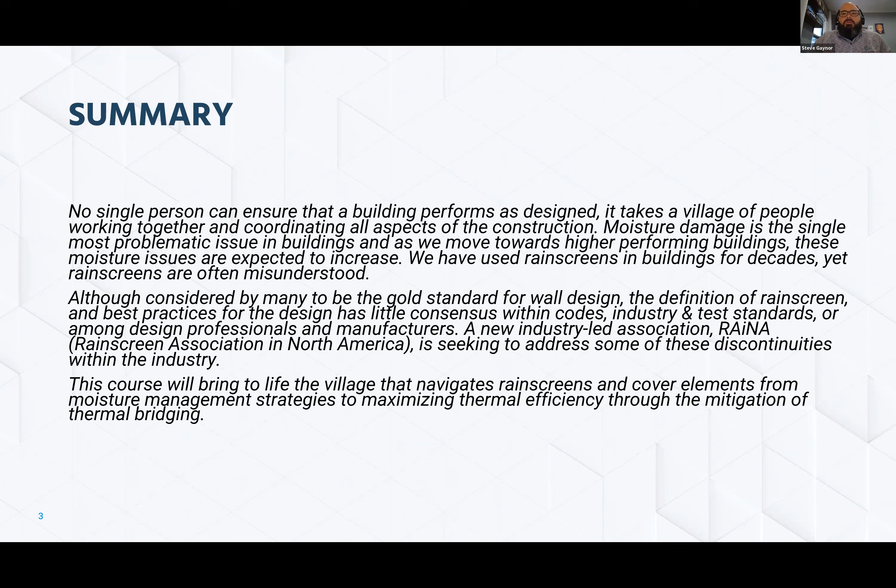So we're going to talk about Rainscreen, which is considered to be one of the gold standards for wall design. The issue, though, is that Rainscreen is not well understood, maybe even by some of those people who talk about it often. One of the reasons why is because there's a lot of different people talking about it, and not a lot of coordination. That's why we'll get at the end to talk about how it takes so many stakeholders and why the Rainscreen Association was formed.

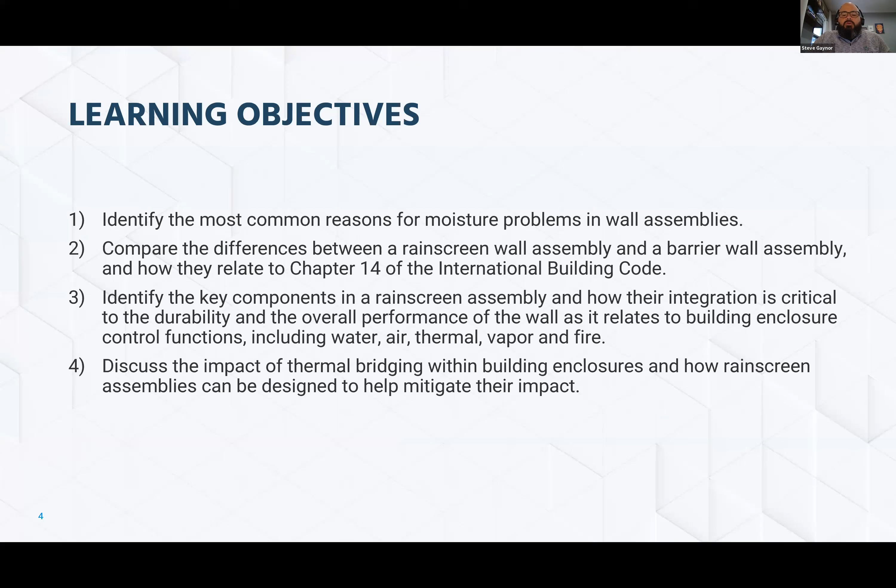So the learning objectives for this presentation are to identify the most common reasons for moisture problems in wall assemblies, compare the differences between a Rainscreen and a barrier wall, then we're going to identify key components in the Rainscreen assembly and some considerations for each of those components within Rainscreen assemblies. We'll get a little bit further into the impact of thermal bridging. You should be able to discuss what those issues are with thermal bridging in building enclosures and how Rainscreen assemblies can be designed to mitigate that impact.

So we'll start with moisture in walls, get into those components. As we talk about those components, we'll have a deeper dive into the thermal bridging discussion, and then we'll talk about the Rainscreen Association North America.

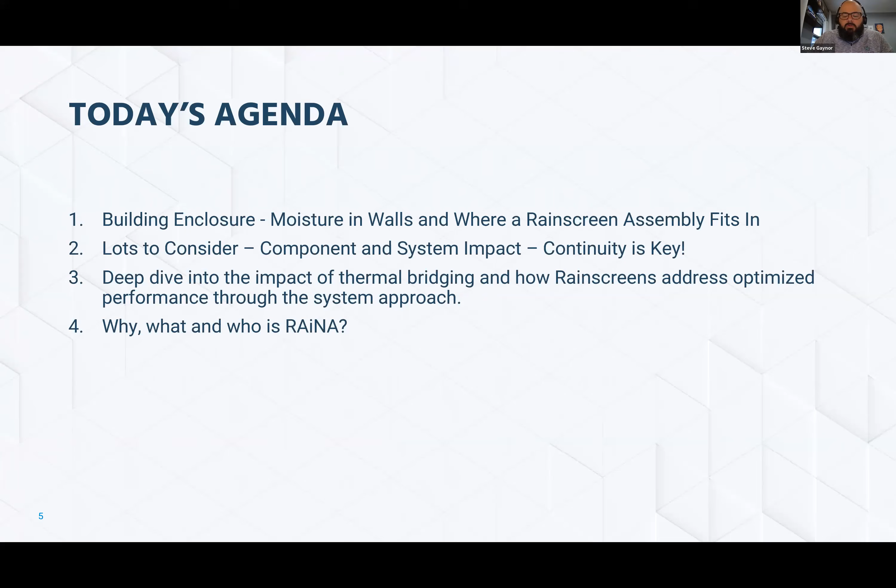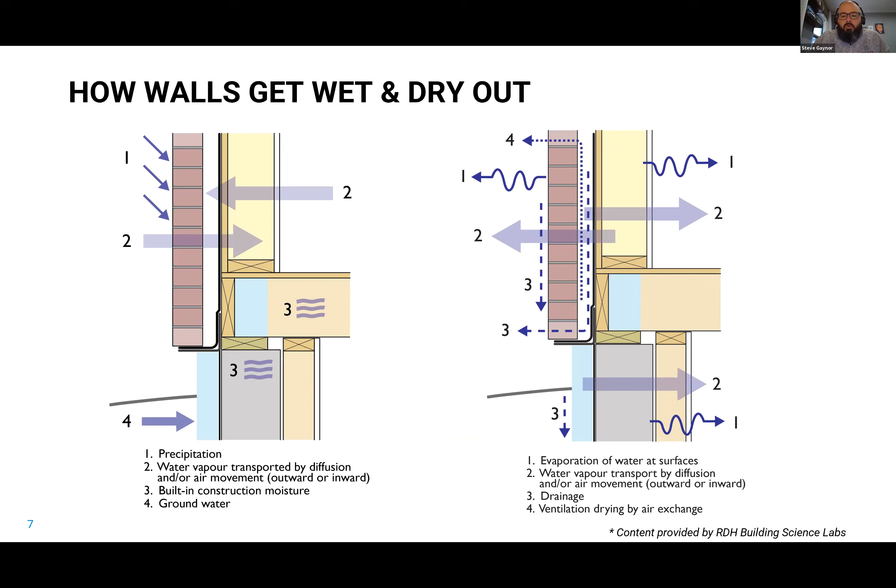As that liquid evaporates, it creates water vapor, and you want to evacuate that through ventilation and drying. Number four there is through air exchange with the exterior. And number two, you also have water vapor diffusion occurring in your favor for drying out—it can be designed to do that also. We'll get into a bit more about that as we go on with these next few slides.

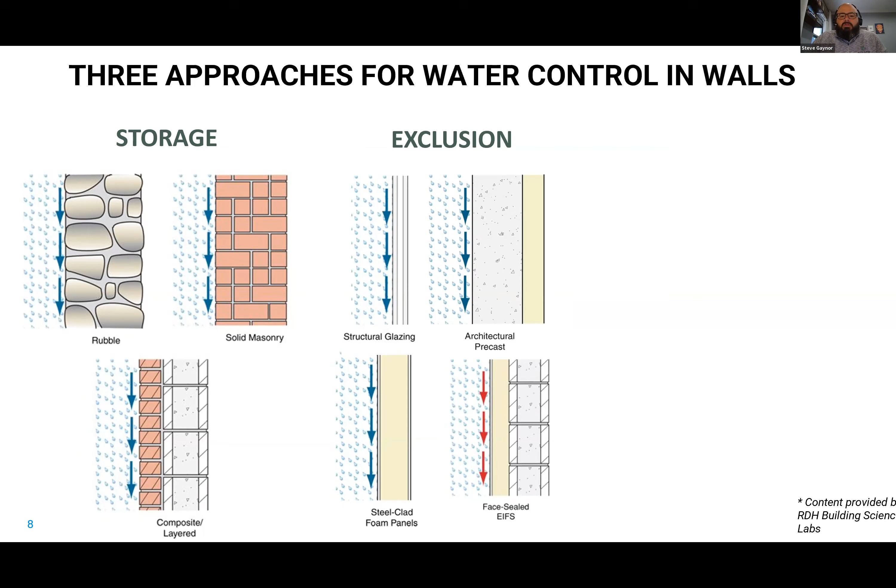Now those seals obviously have to stay perfect over time in order to maintain that perfect barrier and avoid water into the wall system. But some of these other wall designs that we're familiar with have the same intent—to keep the water on the face of the wall system.

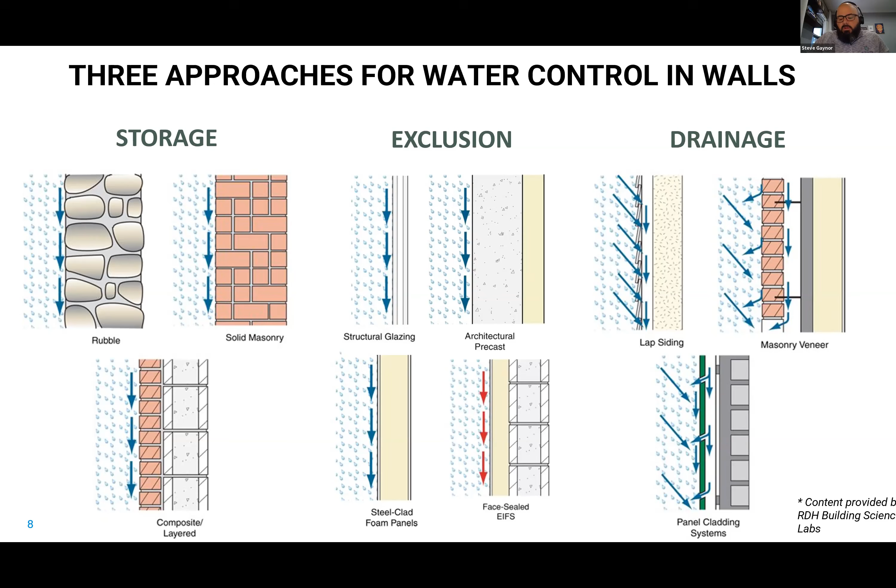Finally, you have your drainage wall systems, and this is where rainscreen fits in. It's a much broader category beyond rainscreen in terms of drained wall systems, but rainscreen is one of these. A drained wall system says the cladding doesn't need to resist 100% of the water coming to the wall, or the face of the wall doesn't need to resist 100% of the water—we're designing the wall so that water that gets in can be drained out, managing it in a different way. We'll talk a lot about that in the coming slides here.

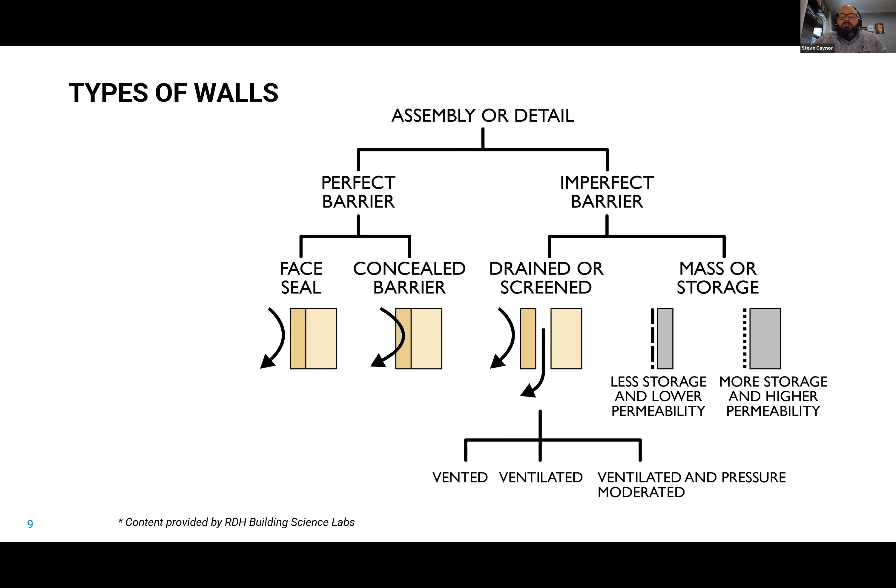It maintains water control by storing that water and shedding most of it, so you don't have leaks. Finally, where Rainscreen fits in is drained and screened walls, that third design where you're managing moisture within the wall system through venting, ventilation and pressure moderation, etc. So what is a Rainscreen?

A Rainscreen, as defined by the Rainscreen Association of North America, is an assembly applied to an exterior wall which consists of, at minimum, an outer layer, an inner layer, and a cavity between them sufficient for the passive removal of liquid water and water vapor.

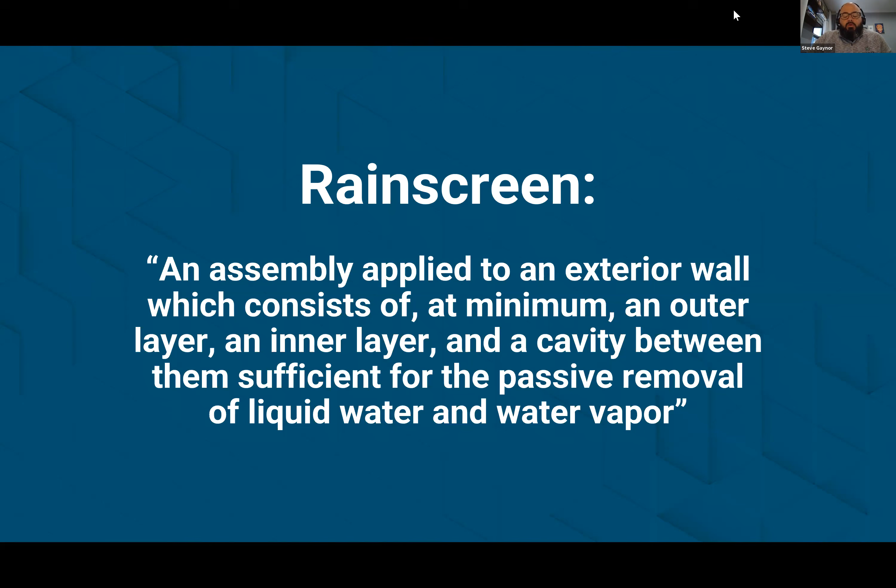I won't repeat that exact definition again since it appears several more times as we go deeper. The Rainscreen Association of North America has defined it this way, and it's the simplest way to describe what constitutes, at minimum, a Rainscreen.

What you're looking at here is the definition above and the parts of the definition described in the diagram below. Again, an assembly applied to an exterior wall system which consists of, at minimum, an outer layer. You see on that diagram to your right.

You're looking at a vertical section of the wall. On the left is a plan view detail, and on the right is a vertical section of that same wall.

A simple, rudimentary Rainscreen design has an outer layer, number 1, which is your cladding or some other face, and an inner layer, which is typically your water barrier or some water control layer that might be insulation or some other system.

And then a cavity between them, number 3, sufficient for the passive removal of liquid water and water vapor. Numbers 4 and 5 show drainage and venting for the passive removal of liquid water and water vapor. That's it.

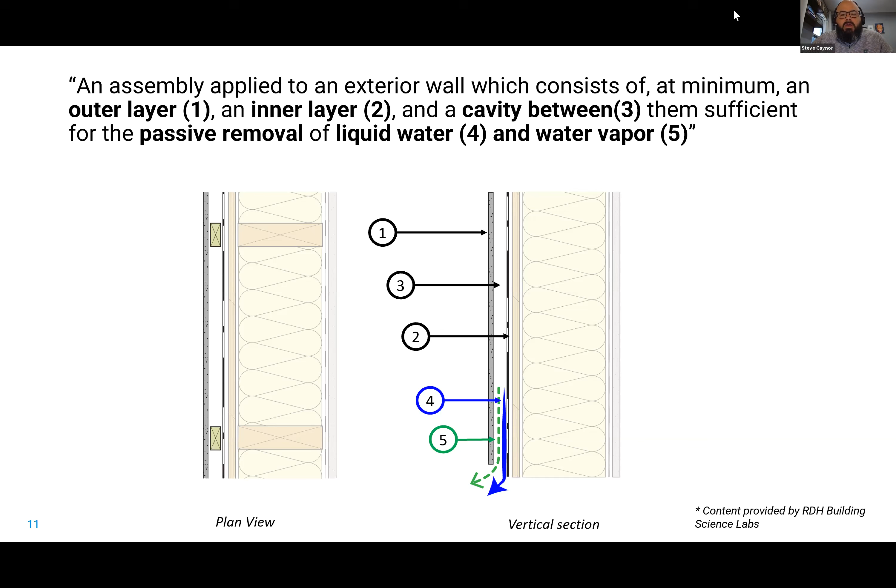That qualifies as a Rainscreen. Obviously there's more to making a high-performance wall system than qualifying for the bare minimum of a Rainscreen, and we'll talk about that later. But that is the explanation of the definition.

It's important to note that almost any cladding material and almost any backup wall separated by a cavity that is drained and vented or ventilated can become a rain screen. Even though you might think of materials typically used in a certain way, often we can redesign those wall systems to use rain screen principles.

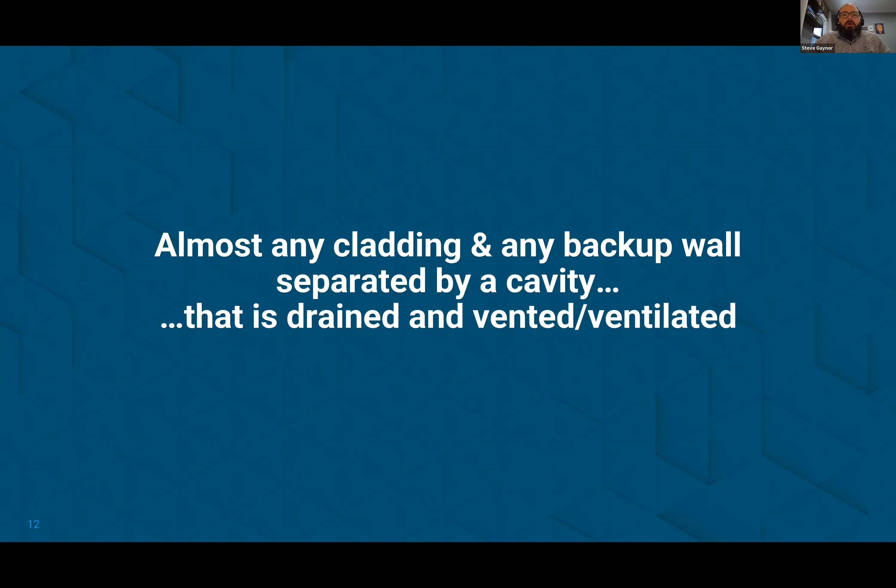So it's not beholden to any particular material. And it's important to note it's not just about the material, but about the system coming together as a whole. It's not the cladding alone, it's not the backup wall alone — it's the cladding, the backup wall, sometimes insulation, etc. That's what this slide is about.

This is saying we have different kinds of wall designs that qualify as rain screens, and we have different buildups within the cavity that might occur, but that doesn't mean we're veering away from rain screen design.

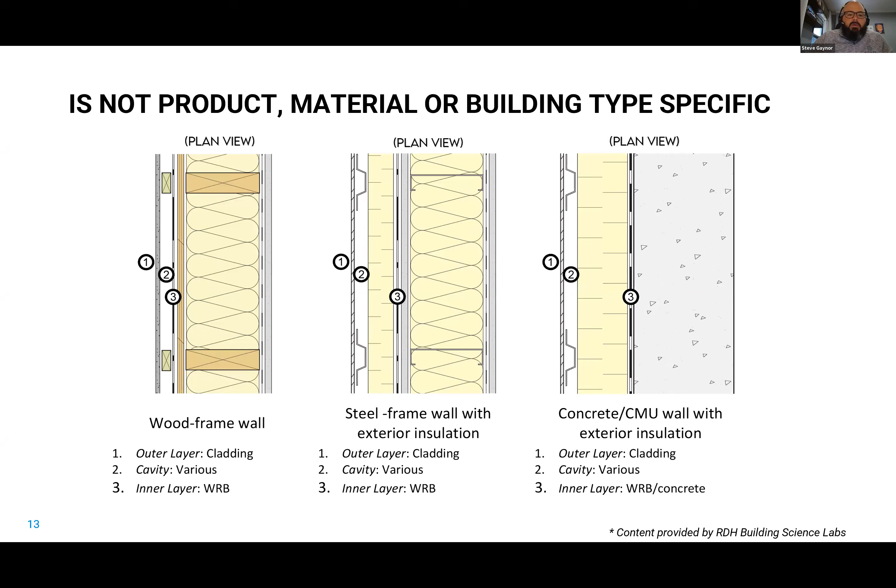To get further into that, we provided a little diagram here going from one end of the spectrum to the other. What I like about this diagram is that each of these wall systems uses a metal cladding.

It shows a metal cladding and stud wall design to demonstrate that with just a different geometry and slight modification, we're moving from one design to the next. It has very little to do with the materials themselves.

Under the not-rain-screen section on the left-hand side, you see your barrier walls, like we talked about before — typically your sealed walls. What we're trying to do is keep the water on the face.

Also under that section are your purely drained walls — walls designed without venting or ventilation that are designed with drainage, possibly for insulation purposes. There are functional performance reasons to do that, but they don't necessarily qualify as rain screen walls.

Then at the dividing line, you start with drained and vented walls — these are the rain screens you typically see with rigid panel systems.

And then all the way at the other end is pressure moderated, pressure equalized walls, where you're creating small compartments. It's a highly engineered system to moderate pressure and manage water tightly towards the face of the cladding.

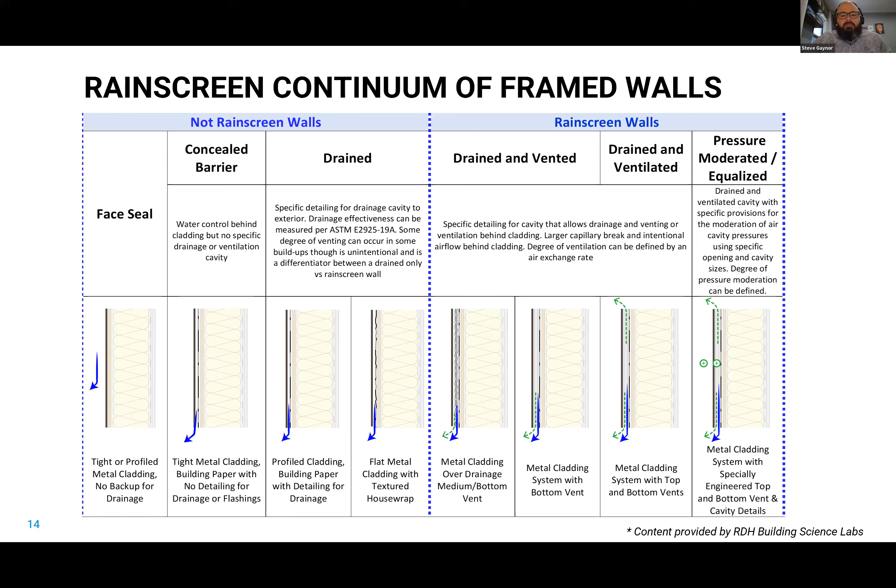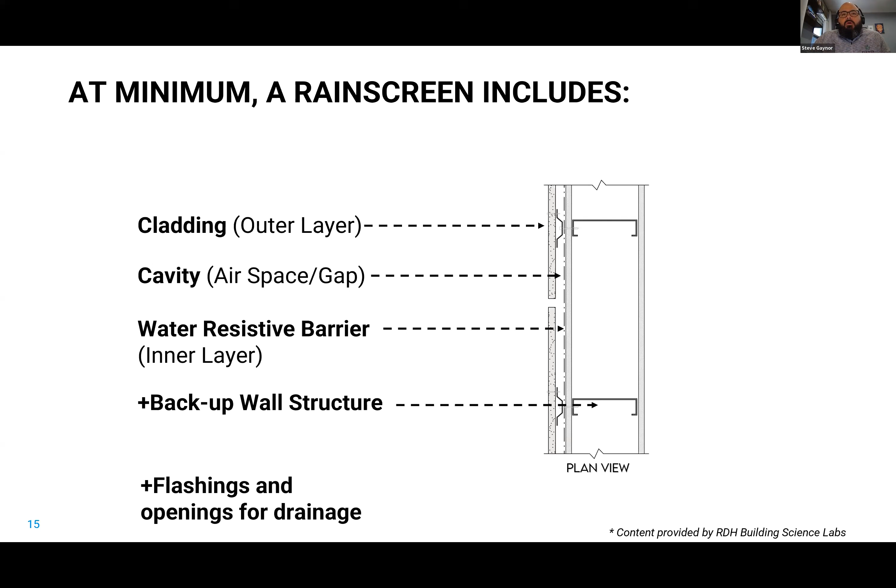That's the spectrum, and we'll get further into some of those designs as we talk about components later in the presentation. So as we said, at minimum, a rain screen includes that outer layer, that air gap, and that inner layer. Obviously there's a backup wall, flashings and other openings for drainage, but that's what's required. However, there are other components in a rain screen wall for different designs and functions.

Some of those components might be a cladding attachment. You need to figure out some way to keep that cladding up on the wall, and that cladding attachment has some other functional purposes that we can talk about.

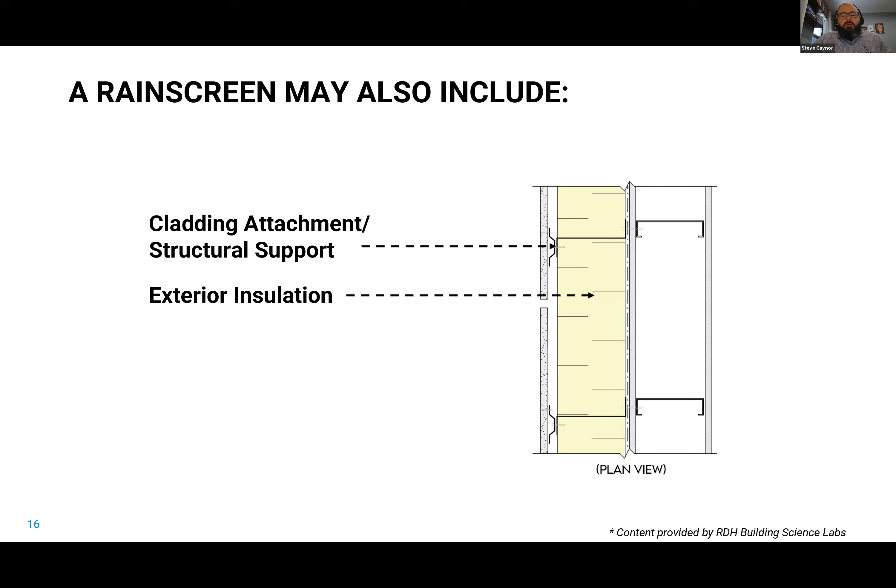Exterior insulation - more and more we're seeing exterior insulation because it's required in most of the country, and that's often going to be in your rain screen wall. That's insulation outboard of your exterior sheathing.

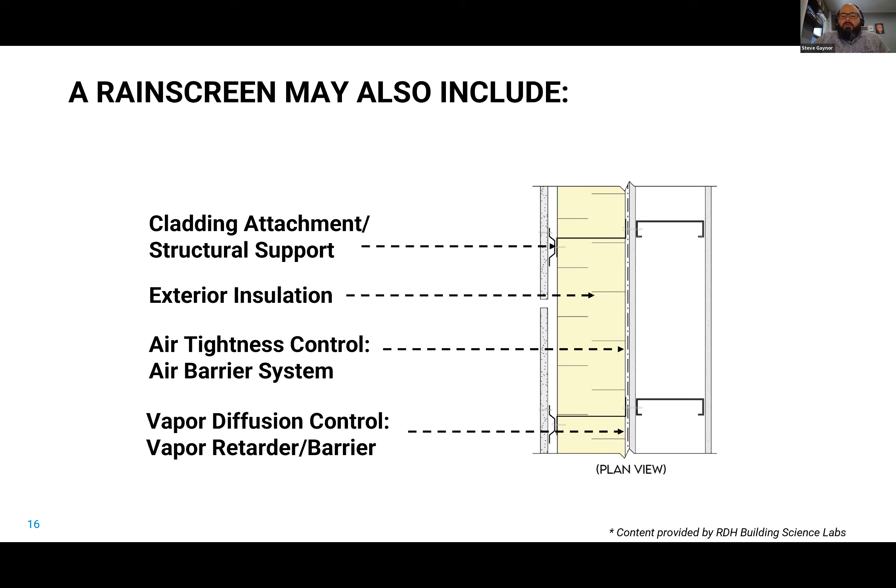We said there's an outer layer and inner layer, and that inner layer is typically your water control layer. But you might also have an air barrier in the rain screen system somewhere, and that air barrier might also be your water barrier. So it could be separated, or it could be the same thing, depending on the design and needs of the building. Same thing with a vapor barrier - less common to see it on the exterior, but it also might be there.

So let's get into those components a little bit. Now that we've defined what a rain screen is and all the components that might be in a rain screen, let's start with cladding. That's what everybody sees when they see rain screen. Often people confuse cladding to mean rain screen.

They might say that material is a rain screen material, which is often incorrect because rain screen is the whole system together. But almost any material can be a cladding in a rain screen, and it's not just the ones you've thought of. The Rainscreen Association is even working with the stucco industry on guidelines for rain screen designs using stucco materials, and that just goes to show it really is about the principle rather than the material.

The important thing for cladding is that it's an exterior finish, that it's water shedding, and that it's unprotected from the environment. That's usually what defines the cladding.

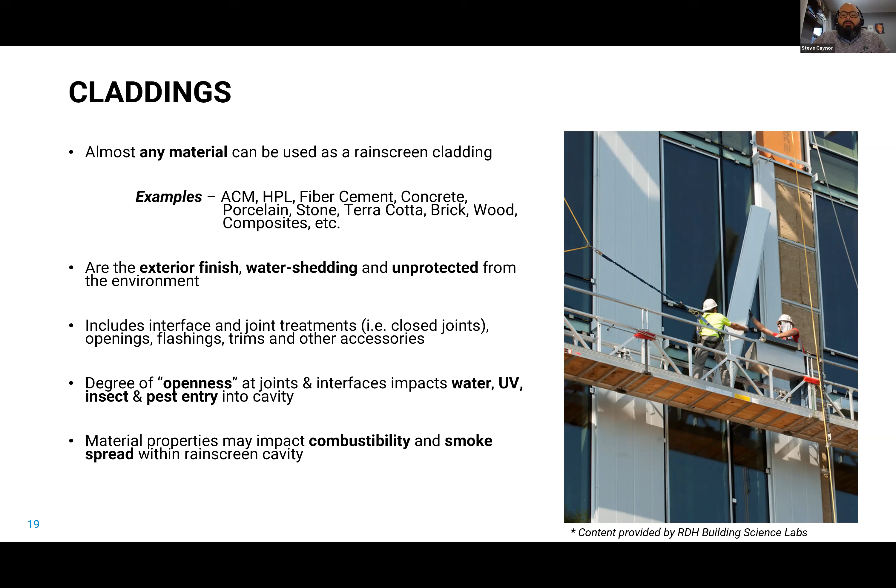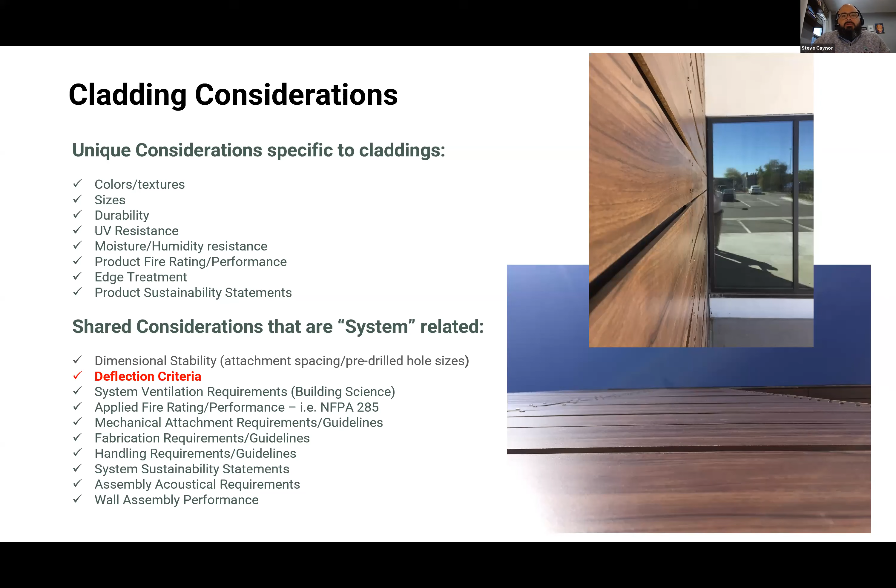You might be designing your rain screen with a metal system or composite material that's able to deflect a fair amount, and those things are designed into not only the panel but the system and the rest of the wall. The same thing if you're designing with something like stone or porcelain that's much more rigid - you're thinking about the rest of your wall system in terms of how it has to be designed to achieve that deflection criteria.

Cavity, or your airspace, your gap - whatever you call it - we have to think about this as a component. This isn't just empty space we're leaving. We are creating this component when we design a rain screen, and we're creating it when we're installing a rain screen.

One of the things I often tell contractors in trainings is that you're treating the cavity as a component, just like anything else you can hold in your hand, making sure that component's in there when you're doing modifications, alterations, things that aren't necessarily on the drawings, decisions you have to make in the field. This cavity is an essential component of a rain screen.

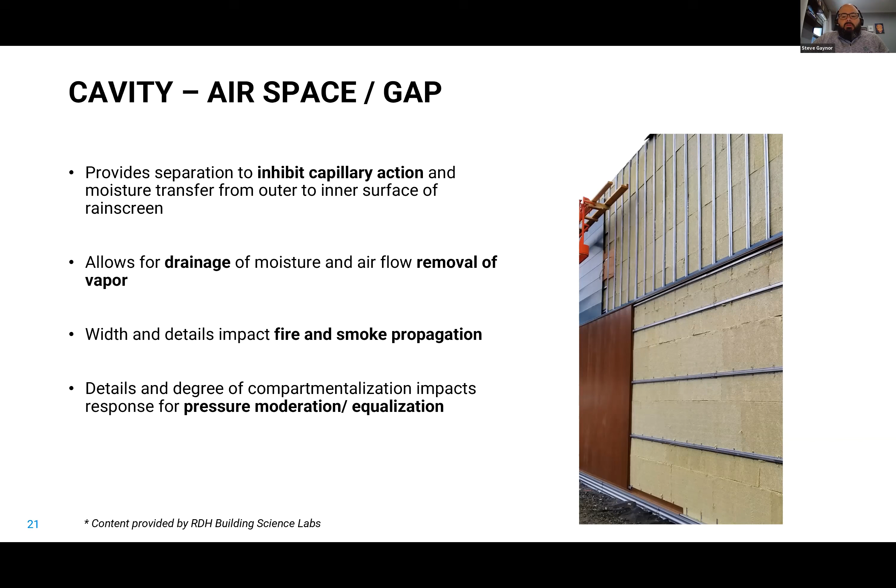Some of the things it does: it allows for drainage and airflow, it inhibits capillary action. On pressure-equalized designs, the cavity geometry, design, and the way we compartmentalize the cavity is of utmost importance. But it also has other considerations, like when we're talking about smoke and fire propagation.

The cavity also provides us with additional functions. If you look at a face-sealed barrier wall system, like we said, it has to be perfect - you're keeping that water on the face of your system. The only drainage plane you have is that face of your system.

With rain screen, because we're putting that cavity in there, because we're separating out the different layers, because we're looking at this as a whole system, you have multiple drainage planes. Not only do you have the face of the cladding, but you have the back of the cladding, you have the face of the insulation, and finally you have the water resistive barrier. So you're creating four drainage planes.

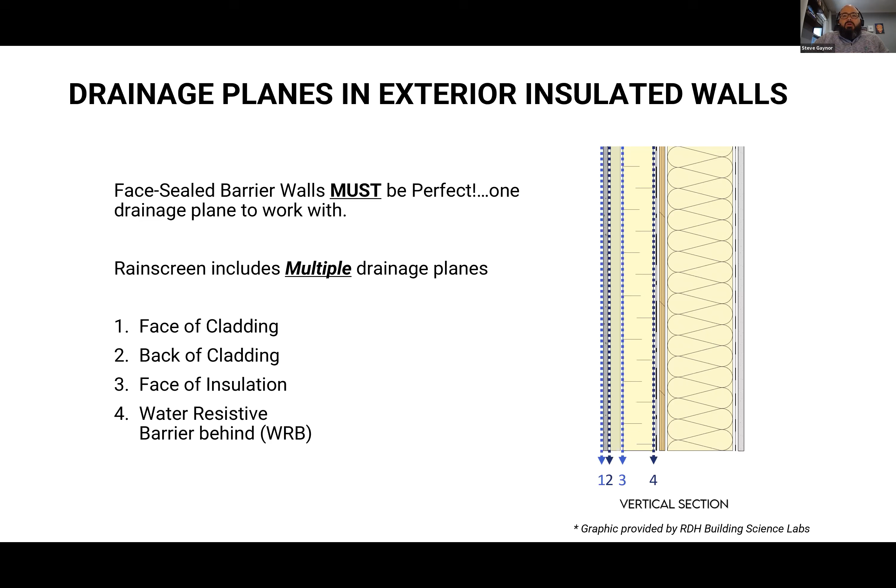Anyone who's had the opportunity to perform an AAMA 509 test and stand in that box and watch as your rain screen performs, watch behind the rain screen and watch where water goes - you'll be amazed to see water drain down the back of that cladding.

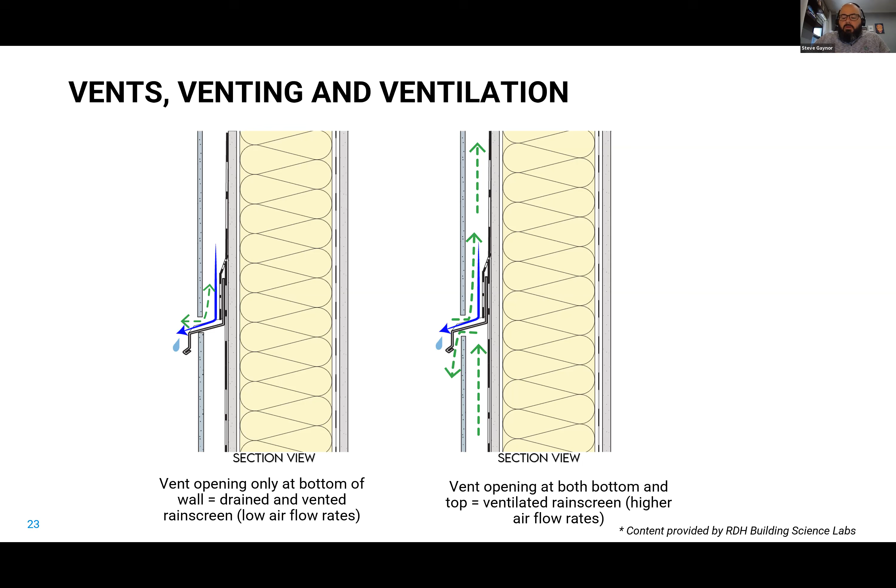Now moving beyond the cavity, we have our water resistive barrier. This is what we were calling the inner layer in that definition. The water resistive barrier might not be a membrane — we all think of membranes when we talk about water resistive barriers, but it might be a system, it might be included in your insulation, or it might be some other system. Whether it's a membrane or another system, your water resistive barrier is an integral part of your rain screen, and it has its own considerations.

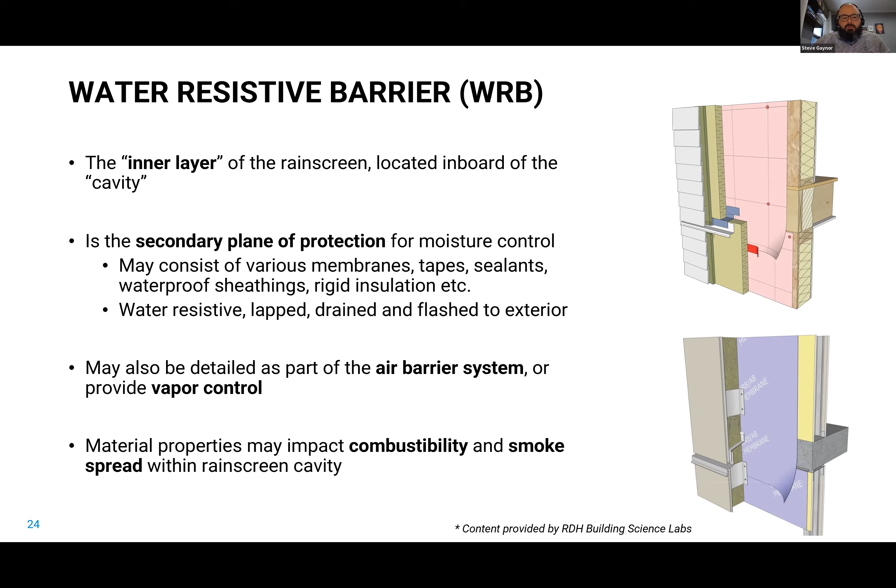Often when I was helping architects a long time ago trying to design wall systems, the question was whether you're going with fluid applied or sheet applied. But now there are so many more options, and they end up being specific to what you're trying to do in your wall system.

One of the things that's very common to talk about these days regarding the water resistive barrier is penetrations by the cladding attachment components. Obviously, we need to attach things outside of the sheathing, and that attachment means we're going to have penetrations in the water resistive barrier regardless. So the question is, what do we do about them? Manufacturers have tons of guidelines around those.

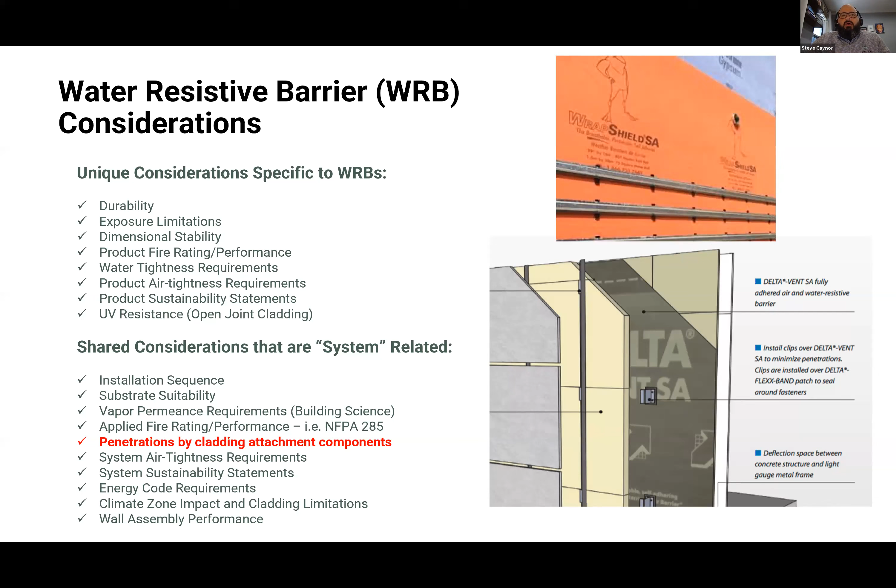Contractors are trained to address those, and there's a lot of consultants out there also helping to address them. The Air Barrier Association, one of the partners for RAINA, is also working on this issue for water resistive barriers, and I know several other organizations are part of that discussion. So I think we're going to see some science-based literature on this in the near future, to see how much of a problem it really is, if it's a problem at all, and how to address it.

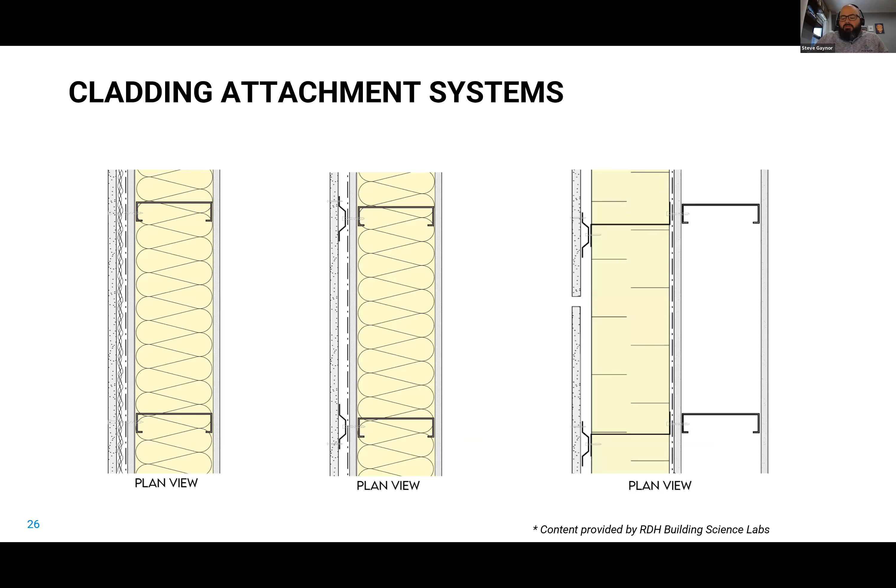Cladding attachment systems — we just talked about penetrations by cladding attachment systems. What you're looking at here is just some diagrams of different types of cladding attachment systems, and they really range from adhesive to high performance structural systems with lots of components. What you're looking at in the middle is what I grew up with, which is basically just metal girts as the only cladding attachment system for a number of decades, until the thermal performance conversation really took over.

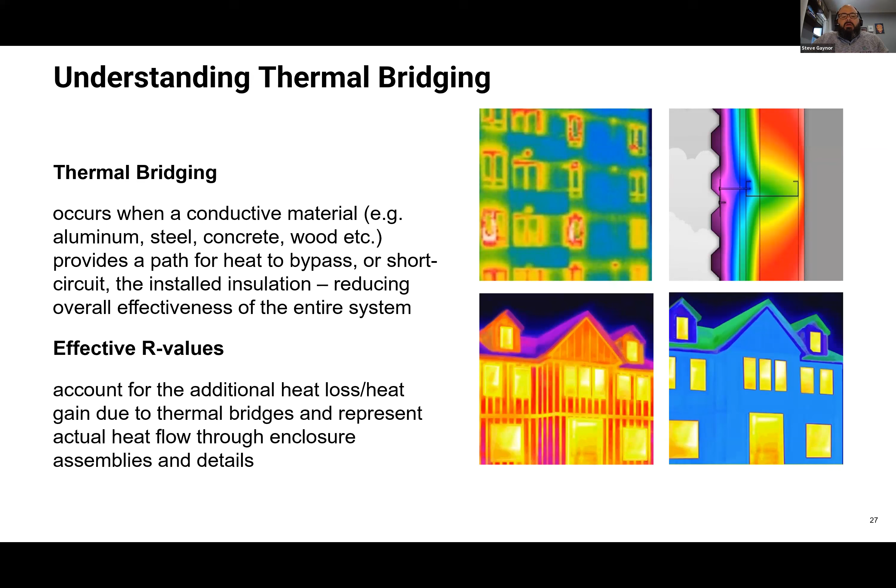Getting into thermal bridging: thermal bridging occurs when a conductive material provides a path for heat to bypass installed insulation, reducing the overall effectiveness of the entire system. That's where we talk about effective R value — the overall effectiveness of the entire system. An insulation might have a certain R value, but when you put it into a wall system like you see on the right here, you might have studs or other penetrations that reduce the effective R value of that insulation.

I'm not going to get into this too much here, but many of you who are more adept at identifying thermal bridges can find many more than me. These are a couple of examples of some obvious thermal bridges in the columns and slab edges, in the attachments, etc.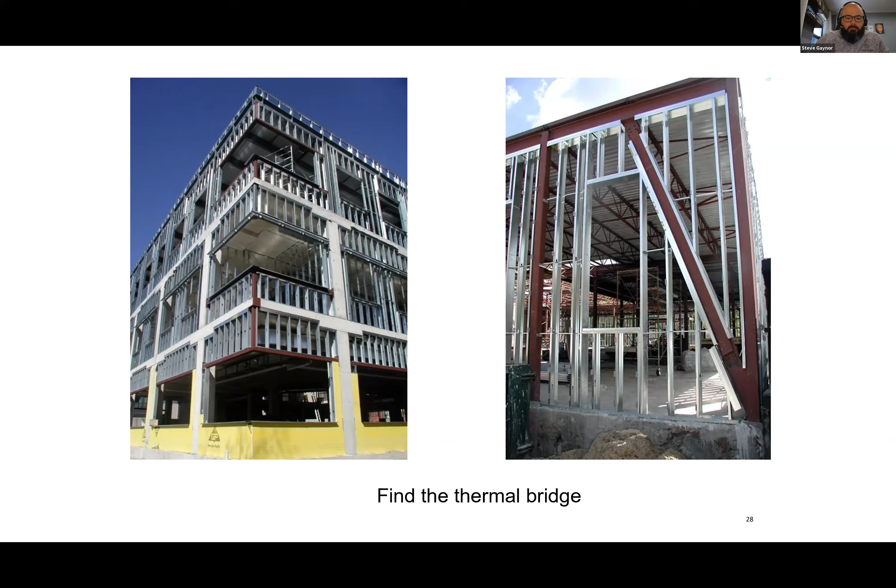Adding insulation to within the wall system, like we traditionally did, provides diminishing returns.

You can imagine, so if we had a typical wall system as we used to build with a stud wall with batt insulation in there, let's say that R11 batt insulation with a typical 16-inch stud wall, that insulation ends up having an effective, or that wall system ends up having an effective R value of 6.6 when you're putting an R11 batt in there.

And so if we're looking at that, we're saying we need more, higher performance out of our walls. Well, the obvious first thing to do is to put more insulation into the wall system. And as you put more insulation into that part of the wall system, you still have those studs to deal with. So going from an R11 to an R15, that's an additional R4,

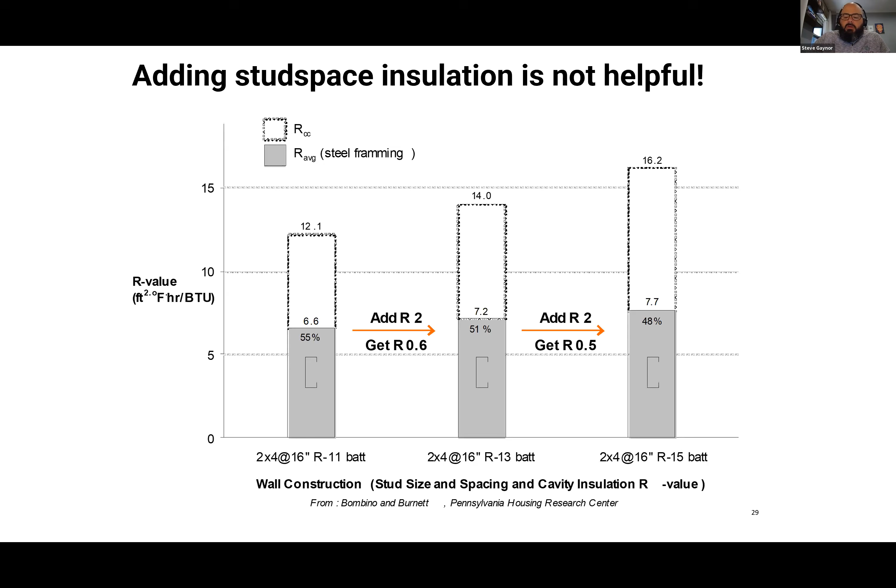really only gets you an effective R value of just over 1 increase, and that shows you why exterior insulation is really where the conversation has revolved around.

So we're looking at exterior insulation that's outboard of your sheathing. You start to see that if we can create exterior insulation in a perfect environment where it doesn't have penetrations around the outside of your stud walls, you're really gaining a lot of effectiveness into the insulating value of your wall system. However, as we know, we need to put some things through that insulation.

And the traditional way to do that was with those metal girts that I grew up with, right?

When we first started to have this conversation about putting exterior insulation on the exterior part of your wall system, the conversation started with, yes, let's put more insulation on the exterior part of your wall system, and we'll put those metal girts through it because we need something structural to attach everything outside of there on, and that way we have a lot of insulation and a structural wall system, and we're good.

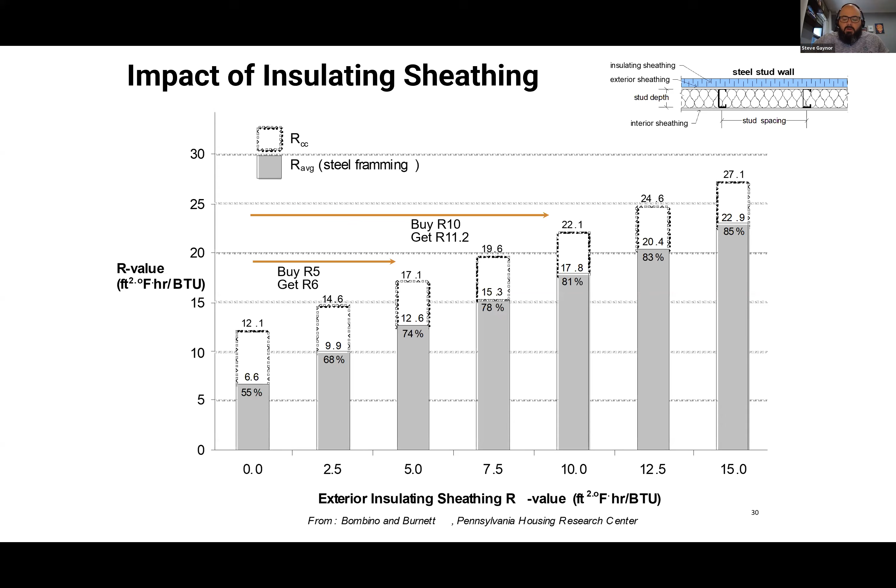The problem is we've just moved that problem of the stud wall system out, right? And so the industry has come up with a lot of innovations to reduce the effective value, or the impact on the effective value of those attachment systems.

What you see here is a lot of different examples, and there are more out there, of different designs in the industry of attachment systems that have moved their continuous rail out, sometimes outboard of the insulation, or at least towards the edge of the insulation, and put non-continuous components through the insulation to really reduce the impact on the effectiveness of the R value.

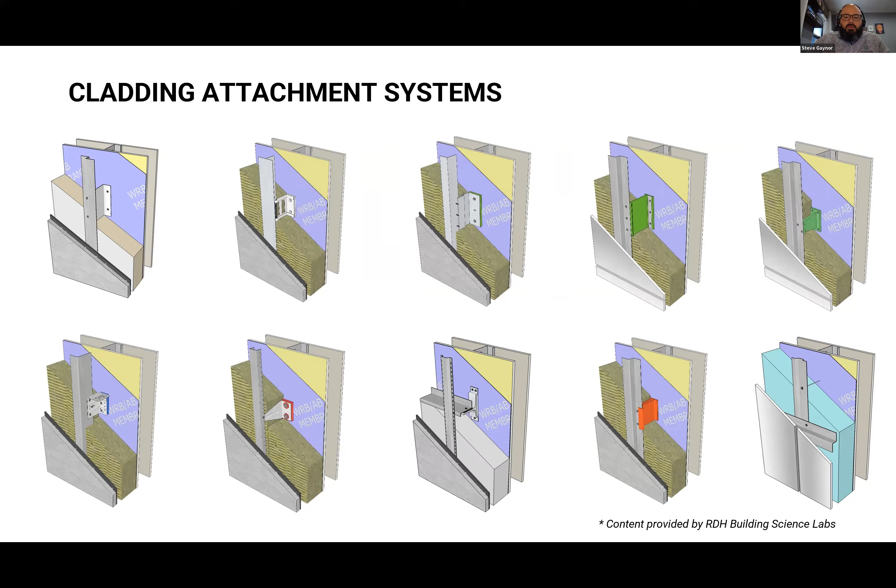So let's back up a little bit. Like I said, when we first started putting insulation on the exterior walls, we started with, let's just use the same technique we were using before with bigger girts, and stuff insulation between those. And if you're putting a vertical girt aligned with your vertical stud, you're really getting a 20 to 40% of the effectiveness of whatever insulation you're putting in there.

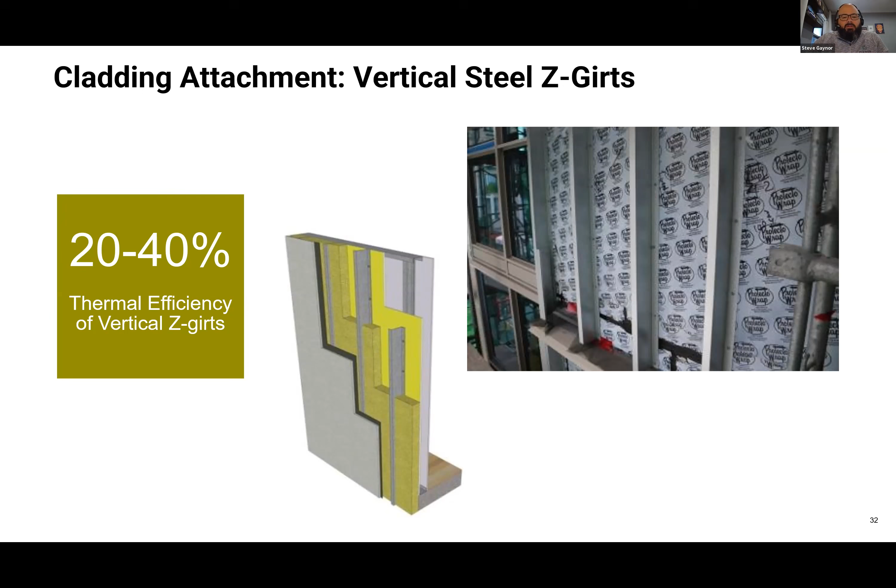And that's obviously better than not having it there, but it's wasting a lot of money and a lot of space in your wall system. As you move those horizontally, yeah, you get better, right? If you have horizontal continuous girts going through your insulation, you might get 30 to 50% of your effective R value, or of the intended R value for whatever insulation you're putting in there.

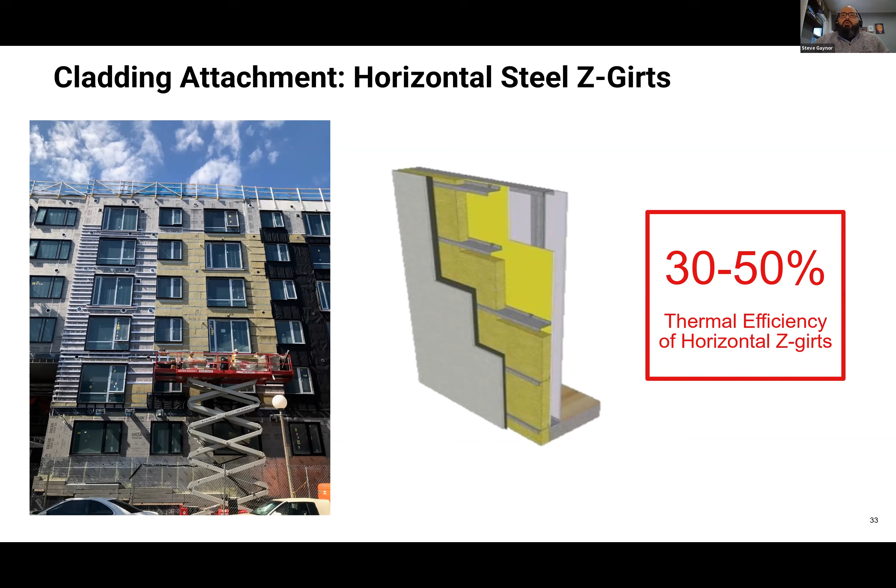And also putting things horizontally, you have to show more attention to detail because of water migration issues and so on.

So, like we said before, the industry has come up with a lot of innovations, and they are continuing to come up with innovations for addressing these sort of things.

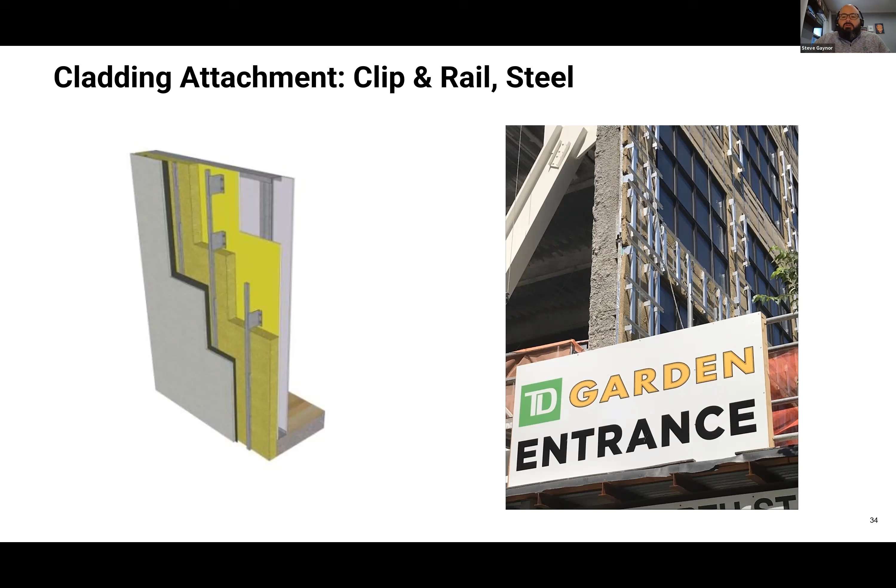You've seen clip and rail systems like the one on your screen, and what that does is it takes non-continuous components, puts those in the insulation, minimizing the amount of metal that has to go through the insulation for structural value, and then putting any continuous components as far out on the insulation as you can, sometimes completely proud of the insulation if you can afford that space, giving you the best values.

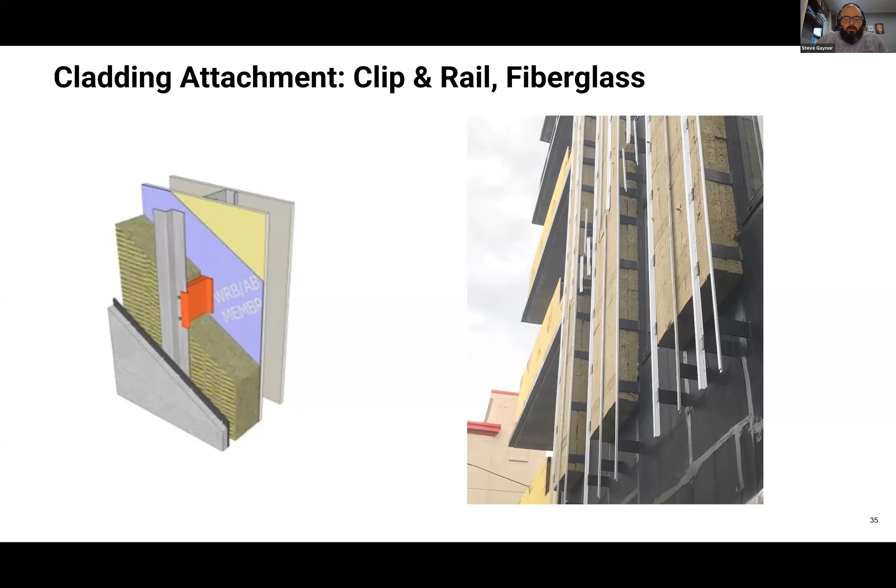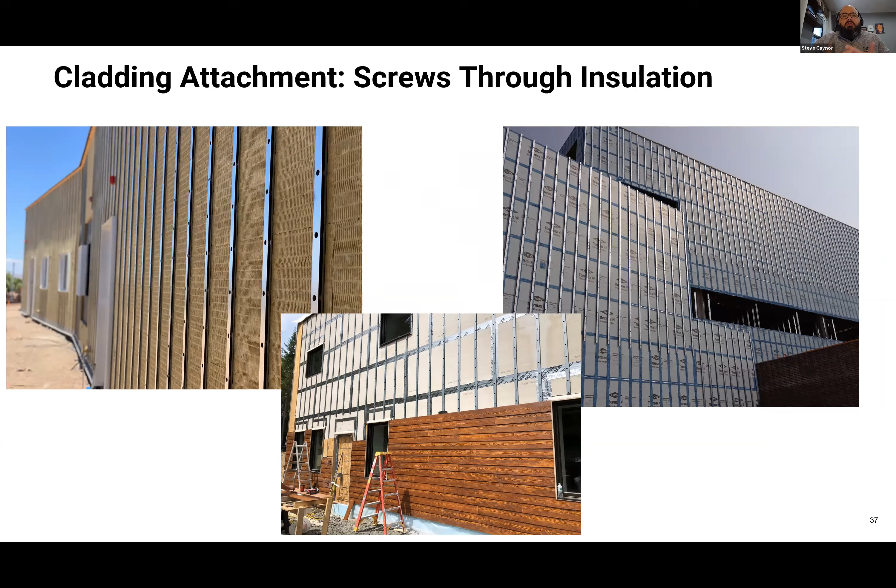Also, you see solutions where we're either using non-metal components to reduce the effect of those bridges. And then you see full girts that are non-metal in certain situations, to make sure that you have no screws going through that insulation. And finally, you also see attachment systems where you have only screws going through the insulation and no girts or larger metal components. These are all designs that are available out there and have pros and cons that might be appropriate for a certain project situation.

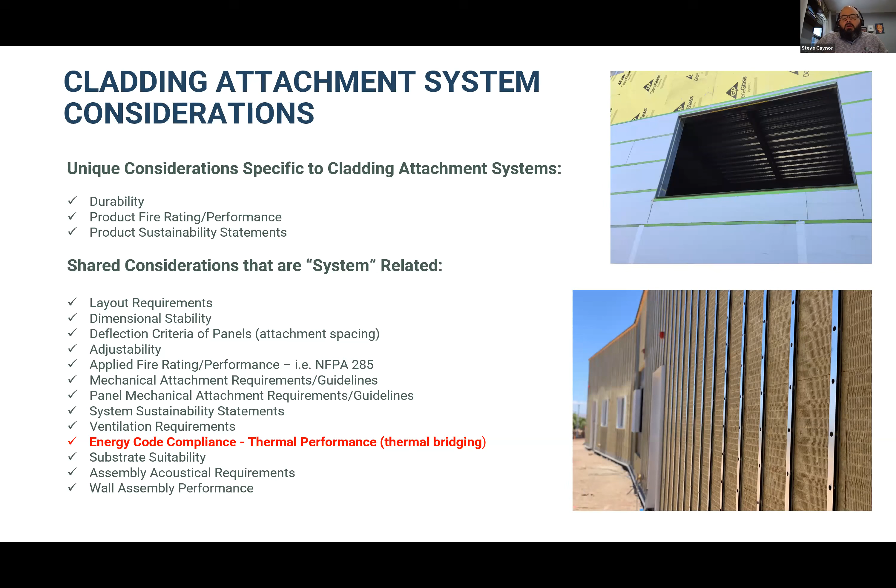There are a lot of considerations when you're talking about the attachment system, and designers should be looking to manufacturers, and manufacturers should be training their installers to identify these considerations throughout the process. Energy code compliance is one of the major considerations, but there's also things like fire, durability, and structural performance that need to be considered, specific to project needs.

Exterior insulation, we've talked about it on probably more than half our slides, but we haven't talked specifically about the considerations around it. Typically, there are a few different materials you might consider for exterior insulation, and those materials come with pros and cons. If you're trying to have a vapor permeable wall, you might go with one type of insulation. If you're trying to really seal up your wall, you might go with another. And then fire and other moisture issues might come into play when deciding whether to go with something like mineral wool or foam plastic.

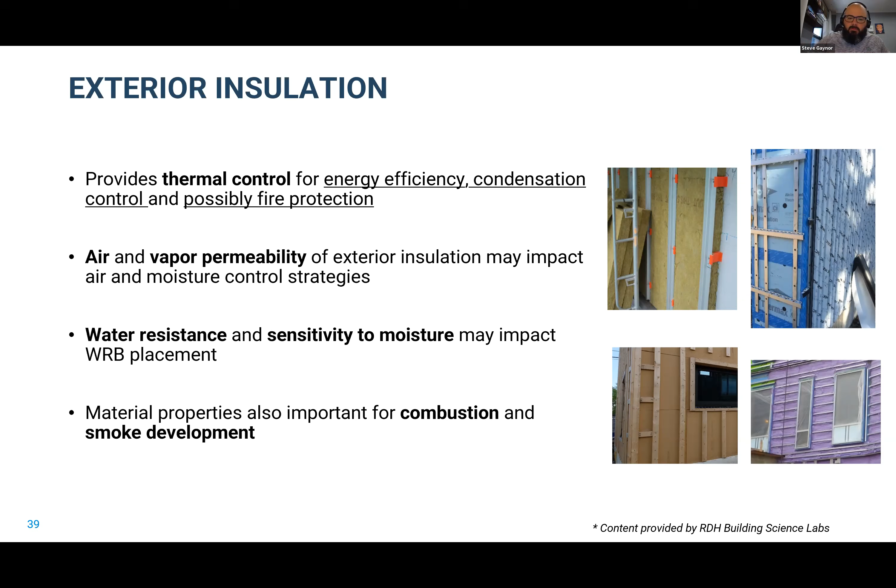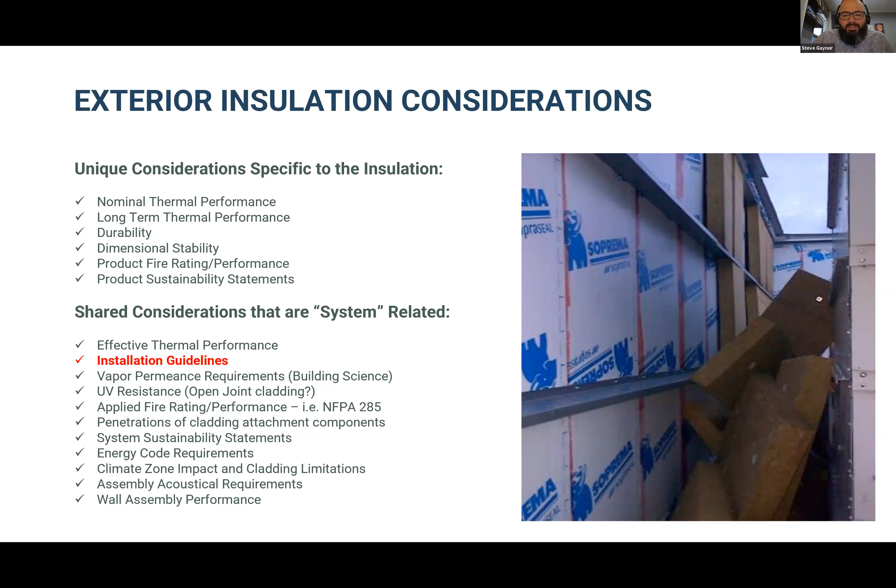Another thing to consider with exterior insulation is installation guidelines, and this is something every manufacturer provides. Often when we're trying to reduce thermal bridging, or even if we think we can design a system that holds in the insulation, like a Z-Girt system here that you see, you might see some variation that leads to what I assume was a perfect wall last night that is now on the ground this morning, because those ties that appear to be in there weren't tied back to the right places.

Design professionals have a lot to consider when it comes to Rainscreen. They also have a lot to gain when it comes to Rainscreen. Rainscreen has a lot of flexibility because you can use multiple materials, often on the same systems or backup systems. So you don't have to change from one to the other when thinking about the performance of your wall system. You can have the same high performance and mix materials, or have depth and things like that to your wall system.

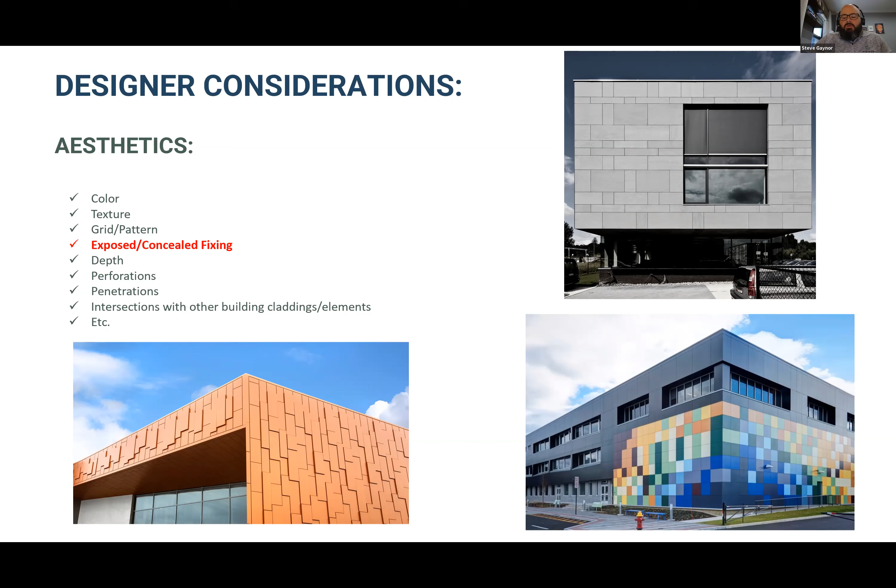They do have to consider structural loads, environmental loads, things like fire and UV, and other considerations specific to the performance of whatever materials you're using for your project. Those parts of the cladding or material are important when considering how it's being used on the rest of the project. So if you're building a low-rise building somewhere with lower wind loads, you have different considerations than if you're building a high-rise in the middle of a congested city.

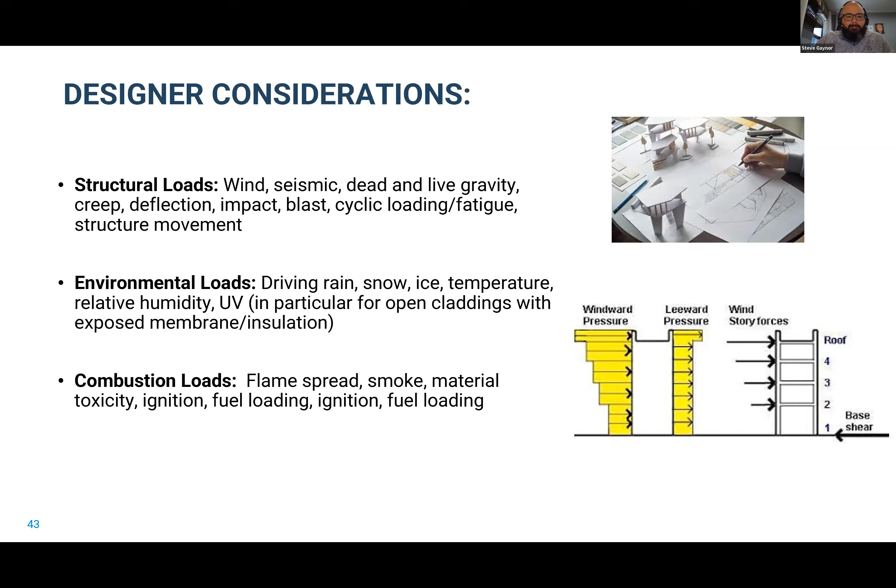There are a lot of tested metrics out there to determine if materials are appropriate for use in certain situations. Most manufacturer specifications have a great list of these standards specific to the materials they're supplying. What you don't see a lot of is system tests. You see AAMA 508 and 509, and if you haven't had an opportunity to witness that, I'd go on to YouTube and see a few of those.

Those come close to system tests. They really test the design of cladding in a certain attachment configuration. And then you have NFPA 285, which I think most people are familiar with, and the fact that that is a system test that not only has to do with the materials that go into it, but also the geometry around the way those materials are put together.

Here's some background noise, please forgive me. I am in the middle of New York City, and anything can be outside.

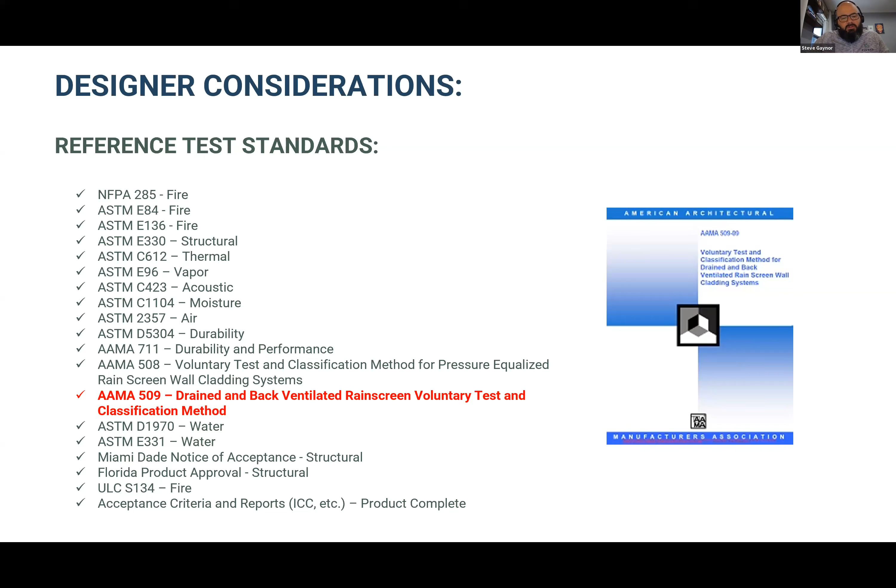Contractors have their own considerations when they're looking at rain screens. Obviously, the rain screen should already be designed for them, and they're working off a set of shop drawings that either they've created or some manufacturer or channel partner has created. They have to make decisions in the field around things that maybe aren't drawn, or modifications made to the building. One really important thing contractors have to consider is expansion and contraction of materials and how they're putting up materials that are adjacent to each other.

Those sorts of things are designed into the system, often manufactured into sliding and fixed holes, both on your panel systems and components beneath that. Contractors have to pay attention to where those are to create high performance, long durability systems.

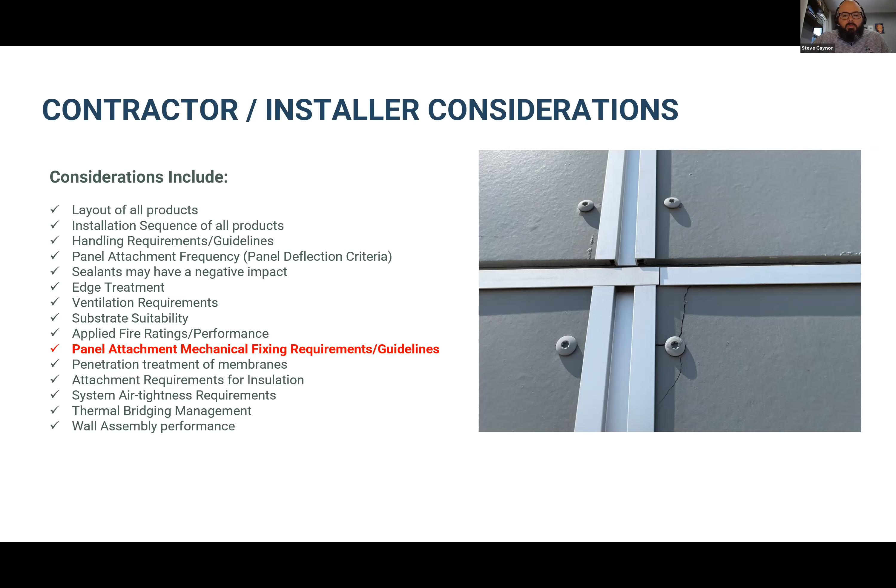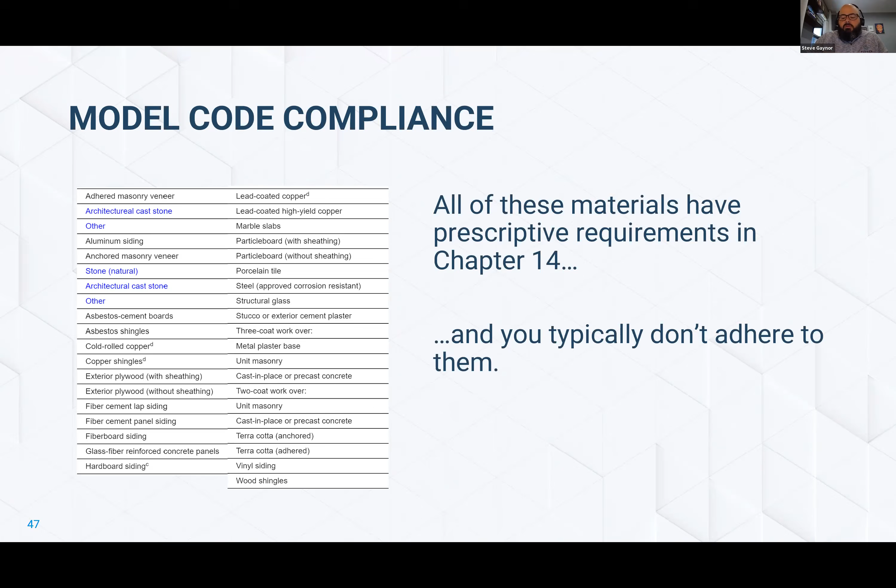You do have a lot of requirements for rain screens in the code, but they're not specifically called out for rain screens. So you start with material. You see all these materials listed in Chapter 14 of the IBC. They all have requirements in Chapter 14. We typically don't adhere strictly to them because we're going beyond that with high performance systems, not going with the prescriptive method, often going with the engineered or calculated method. So Chapter 14 does reference

other chapters for fire and structural performance, specific fire tests, material qualifications, and prescriptive methods to use the material. Chapter 14 doesn't reference energy performance of assemblies. You have that in Chapter 13, then the IECC, which references ASHRAE, and you have to get into that. But it's not specific to the full assembly. Water performance isn't specifically addressed. Assembly design with thermal movement, requirements for materials not specifically listed. The code is on a 3-year cycle, and that takes a long time to get new materials and new methods into the code. And rain screens are not currently in the code, although the Rainscreen Association is trying to change that.

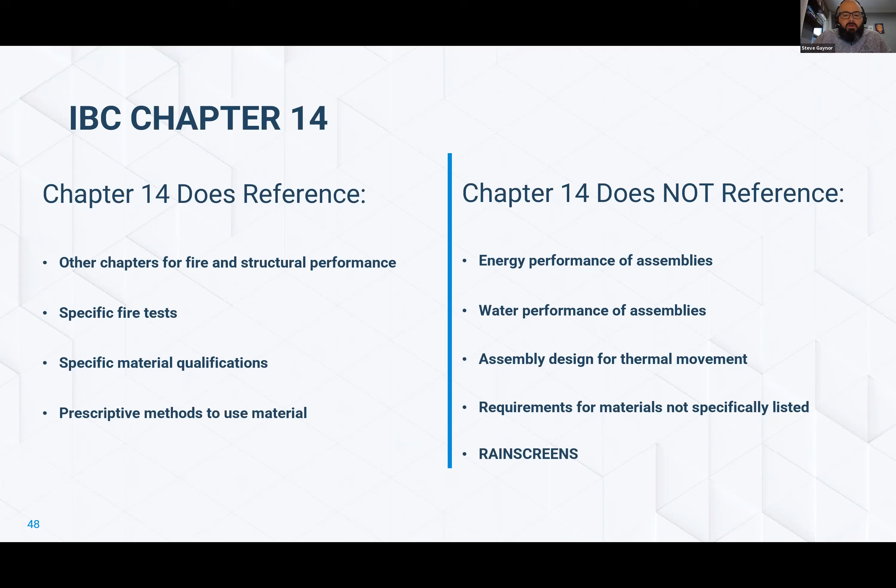It's important to note, there are a lot of methods or requirements for materials in the code. There's not a lot of requirements for systems in the code, and so when we're designing high performance systems, we're typically not going with the prescriptive requirements, but we're going with those performance or engineered requirements. That goes to engineering like seismic engineering, but it also goes to calculated U value and NFPA 285 system tests, and also engineering judgments around those, and then deflection limits.

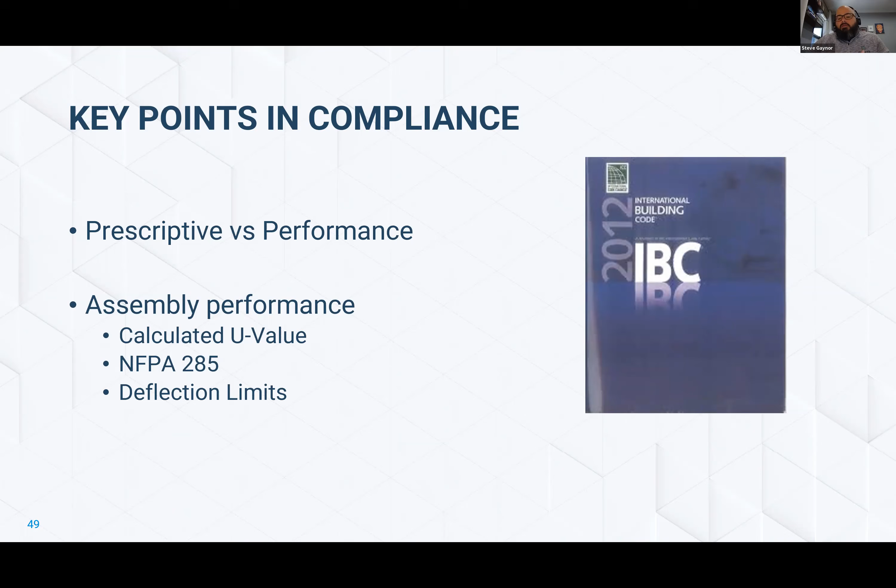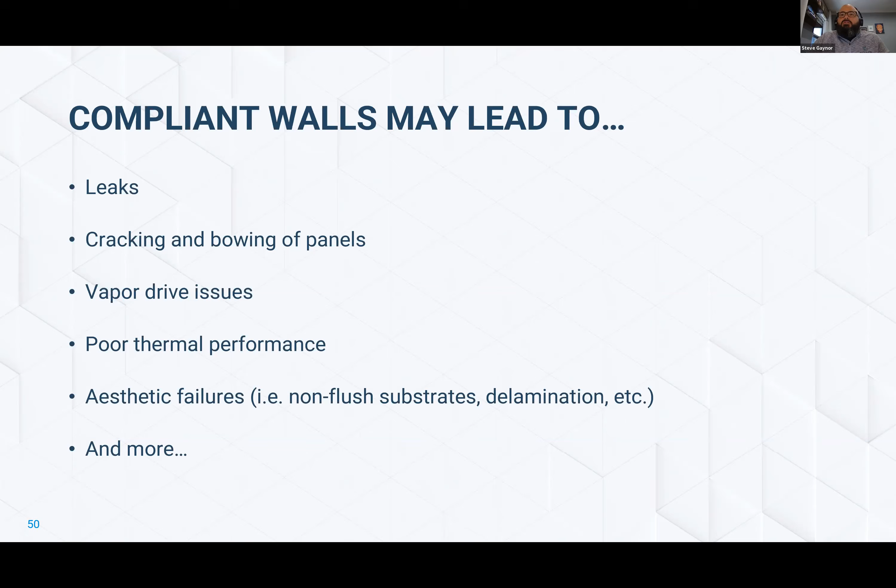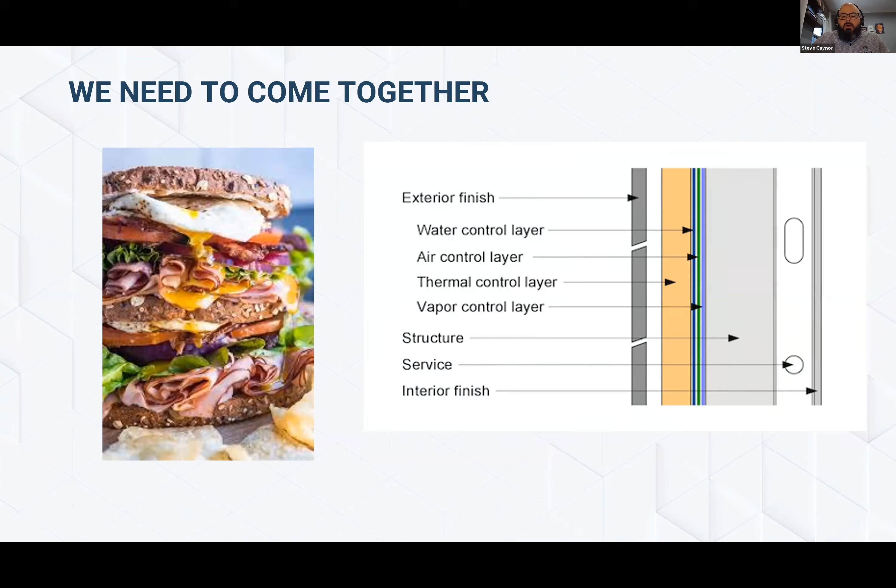systems when it comes to exterior wall systems. That gets right into the Rainscreen Association and what we're doing at RAiNA. So let's talk a little bit about RAiNA and the Rainscreen Association and why we're here. What you see here is a pretty sloppy sandwich, but hopefully tasty. And what makes it tasty is the different layers working together. That's the same thing with a Rainscreen Association.

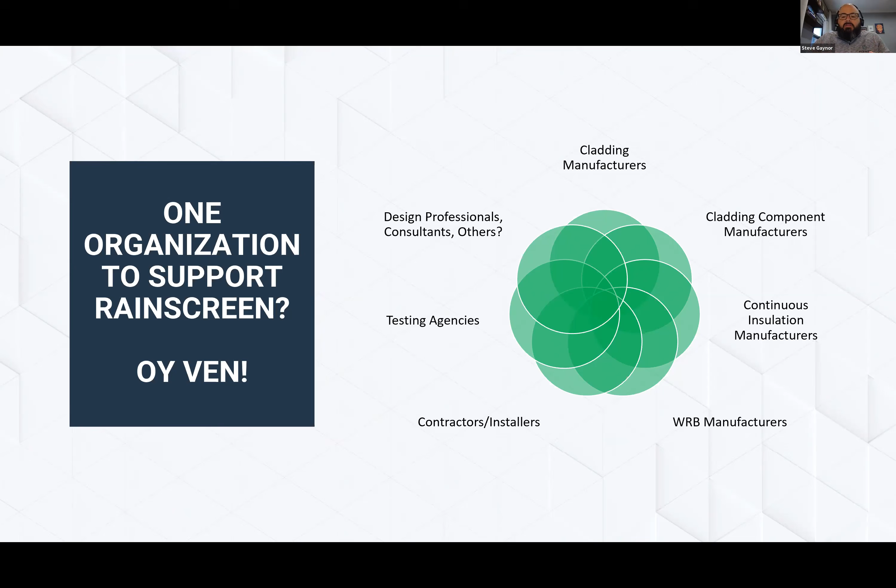With the Rainscreen assembly, we have different layers working together to create that final assembly. And not only do we have those different layers, we have those different materials, we have different suppliers, installers, we have all sorts of stakeholders throughout the process. It's going to be your design, the architect and design professionals, consultants, testing agencies, et cetera. And right at the center of this very confusing Venn diagram is where successfully installed high-performance multifunctional Rainscreen assemblies live. That's where everything comes together and you get that really great wall assembly.

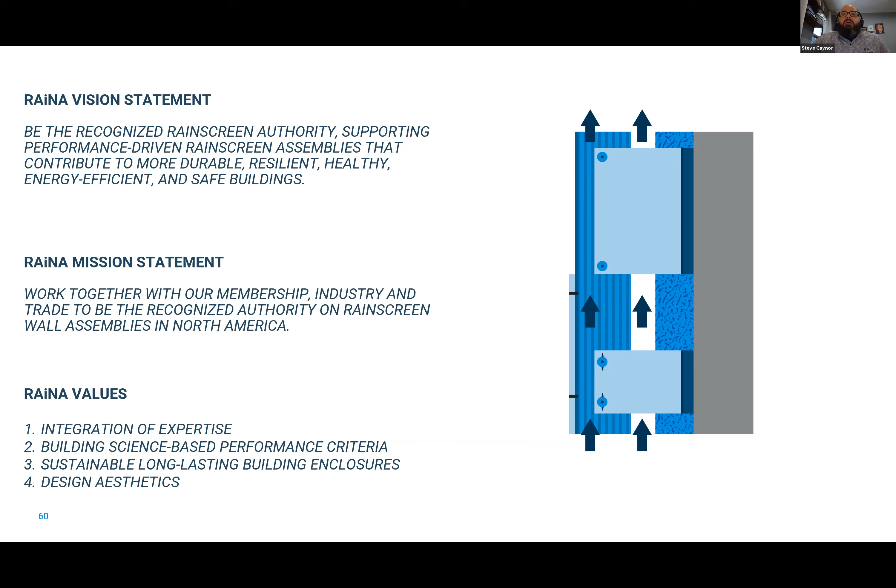Also, it's important to note that we are not looking to reinvent the wheel here. We are not looking to take on things that other organizations have taken on and done great work at. So what we want to do is take the work that's been done in other parts of the industry and bring those together, and say, okay, how does what's been happening at the Air Barrier Association match with what MCA has done with claddings and geometries there? And can we get those different guidelines together and come up with a more broad, holistic guideline that references both of those?

In fact, the Air Barrier Association is a formal partner of the Rainscreen Association for just that purpose, where we want to keep that expertise where it is. We've worked with FGIA on the AAMA 508 and 509 during their revision process, and we have input from the technical building knowledge committees under the AIA. We also have communication with the international ventilated facade organizations.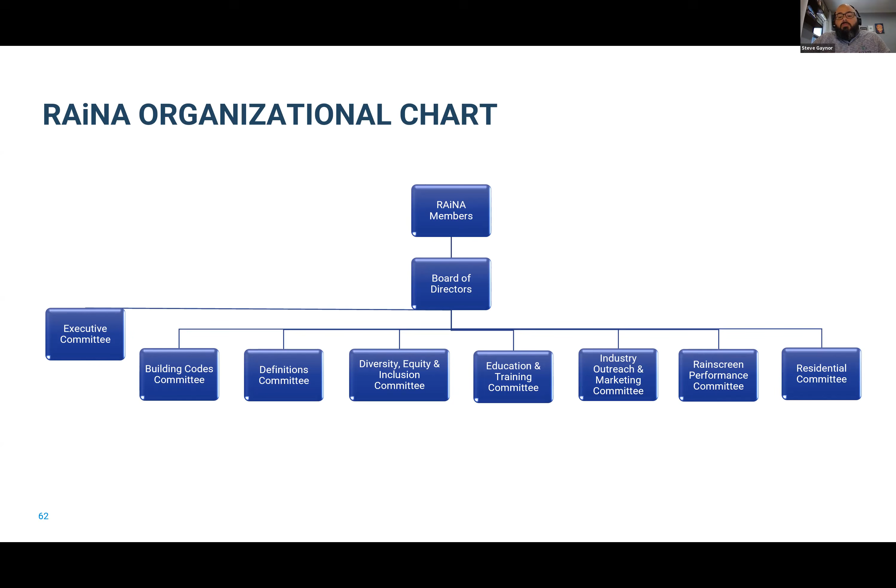The 7 committees are our building codes committee, working on codes and code changes and communication with other standards organizations, our definitions committee, our diversity, equity, inclusion committee, education and training, industry outreach and marketing, Rainscreen performance, and our residential committee.

RAiNA's 2030 vision is to be the true North American coalition. That means United States, Canada, and Mexico, and we are already significantly working towards that. We will be an accredited standard development organization, and that allows us to have our guidelines go directly towards codes and standards that you're familiar with. We want to have the majority of active and growing membership to be contractors and architectural firms, because that's really where the rubber meets the road in terms of making Rainscreen work and better buildings. And RAiNA will be the center of excellence for all things Rainscreen. Industry and regulatory bodies will look towards RAiNA for guidance and participation.

Our highlights, again, we already talked about it. We have 94 member companies right now, hundreds of representatives from those 94 member companies serving on 7 standing committees that are creating work based on work plans and have their own independent budgets. Check out the website for RAiNA that was developed last year and is becoming more and more functional for work within the committees. We also have a technical bulletin that was prepared by the Performance Committee, and you saw a few things taken out of that technical bulletin as part of this presentation. Check out the website, and that's the end of the presentation here.